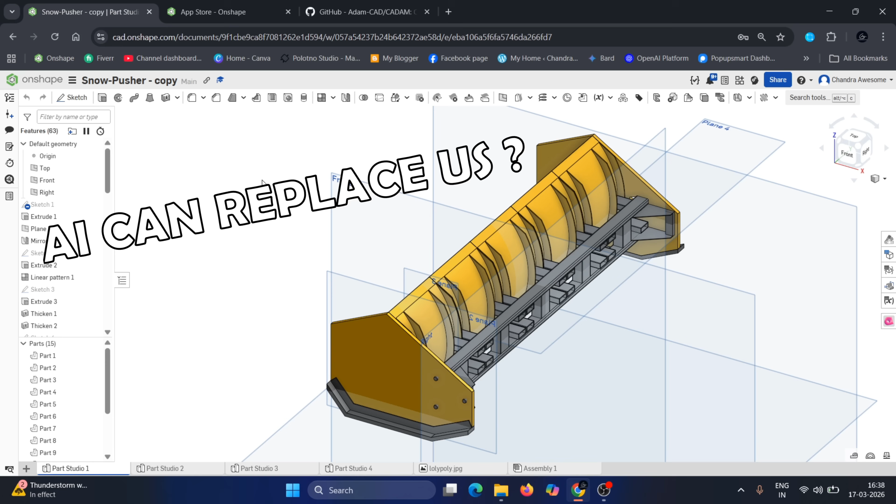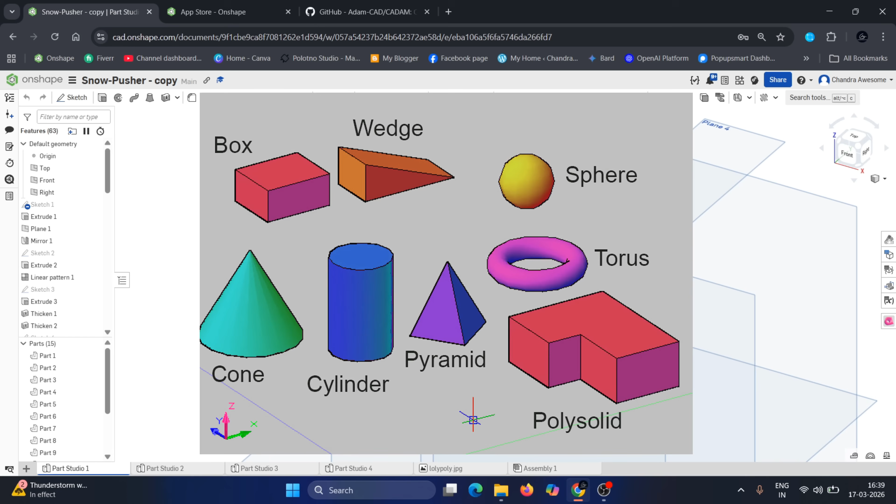So, do you think AI can replace us? Write your comment below so I can read it and reply back to you. My opinion is, yeah, AI can replace us but not completely, because it can replace 40 to 50% of CAD jobs but cannot replace 100%, because AI can only design basic shapes currently. For complex designs like the one we've designed right now, it cannot be designed by AI because it needs very precise techniques and tips we follow while designing a specific product or model in CAD software.

So I'll explain how CAD works here. Every CAD software is a piece of code in the backend. But to train an AI model to generate such a product, it needs very accurate coding. For example, if we draw a simple curve like this in the CAD space, the code for that single curve has too many lines - for example, it might take 10 lines just to draw this curve. That's why AI cannot replace us, it needs very accurate, more training for that. It's not simple text prompting, it needs a different level of precision.

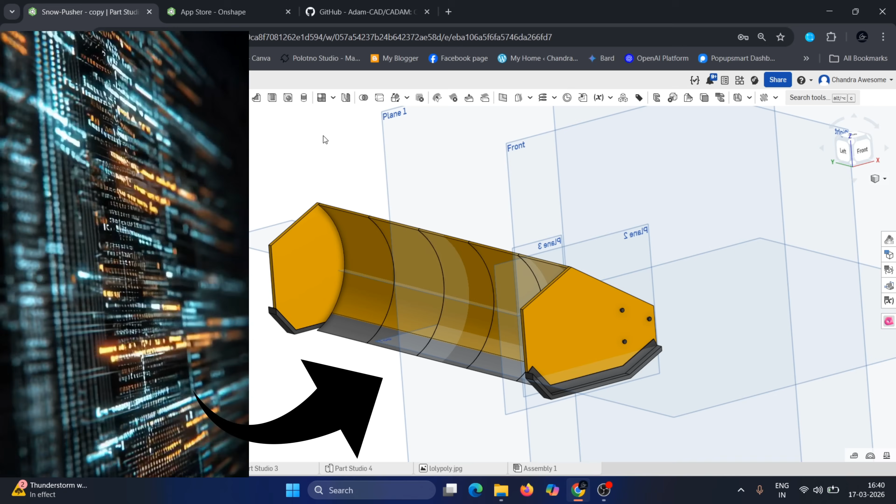Even though AI can build software, it cannot build the shapes. That's why AI tools are actually focusing on coding. By using the code, they're generating the designs instead of using the actual process or method we follow for designing a product in CAD software. So instead of competing with AI, why don't we take advantage of it? Yeah, let's take advantage of AI.

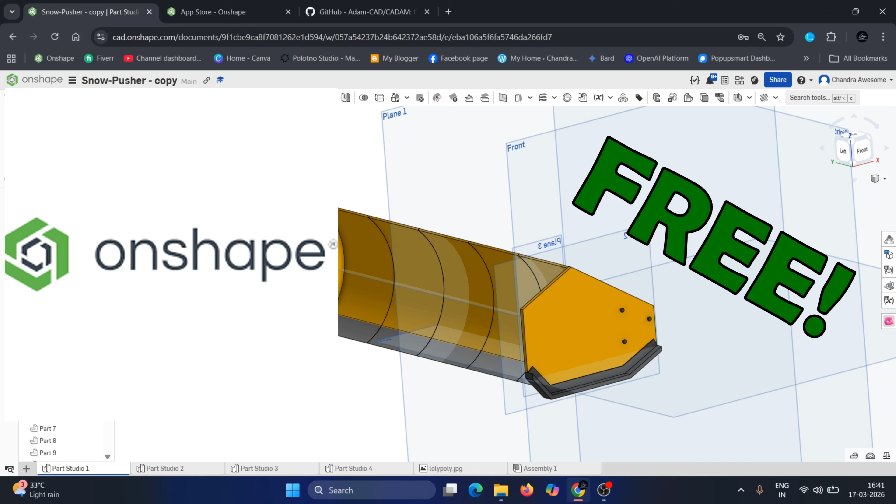After verifying many AI CAD tools, I found one that is absolutely free, but only for Onshape users, not for any other CAD software. I'm going to show you that tool, it's called AdamCAD. Just search adamcad.com on Google and you can find the page. The developer used the Onshape API along with AI tools to build a text-to-CAD tool using the Onshape interface.

Here we just need to give the prompt and it will automatically design the part which we need. This is the process - you can go to the website. How does it work? I'll explain in a simple way. We just need to give the prompt, and it will integrate with the Onshape API, write the code in the backend of the part studio, and give us the shape directly in the interface.

We have a trial version for it, if you want to use it you can. When you sign up, you'll get a one week trial. You can try how it works, and there's no free tier option, you have to pay in order to use it. But for Onshape users it is absolutely free, and I will tell you how to take advantage of this tool right now.

And we have another approach as well. This tool is developed by only one developer, and he's also made his source openly available, it is open source. You just need the instructions and code, everything is there. You just need to install it with your local server or cloud and integrate with it.

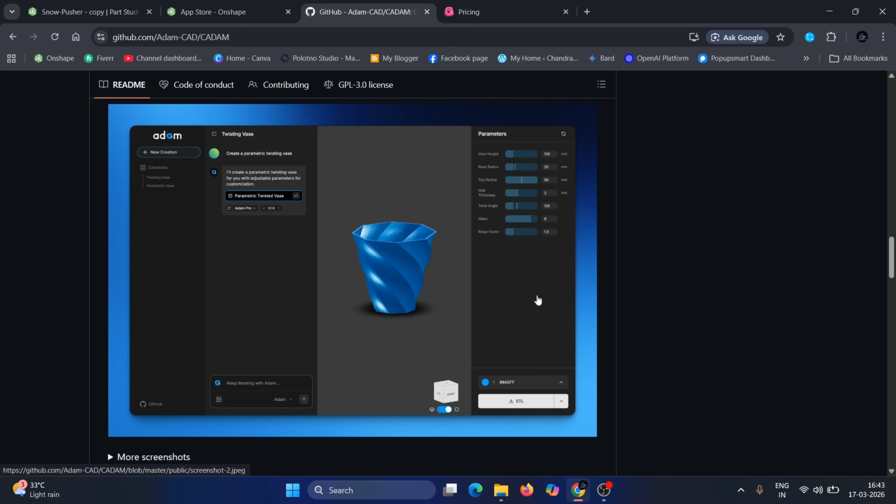But in order to use that, you need an AI CAD model API, which requires tokens to use, because the API is not free. But if you already have any API, you can integrate with it and create models like this. You can see the interface of it. How does it work? You just need to give the prompt and it will design automatically, but it only provides STL files to download. So if you are a web developer, or if you have a friend with developer skills, just go ahead and take advantage of this.

I'm going to attach this link in our description, go review it on your own. So right now let me show you how to use this in Onshape. For example, just go to the App Store - click here, go to Onshape, and you can find the App Store, right? Go to the App Store of Onshape.

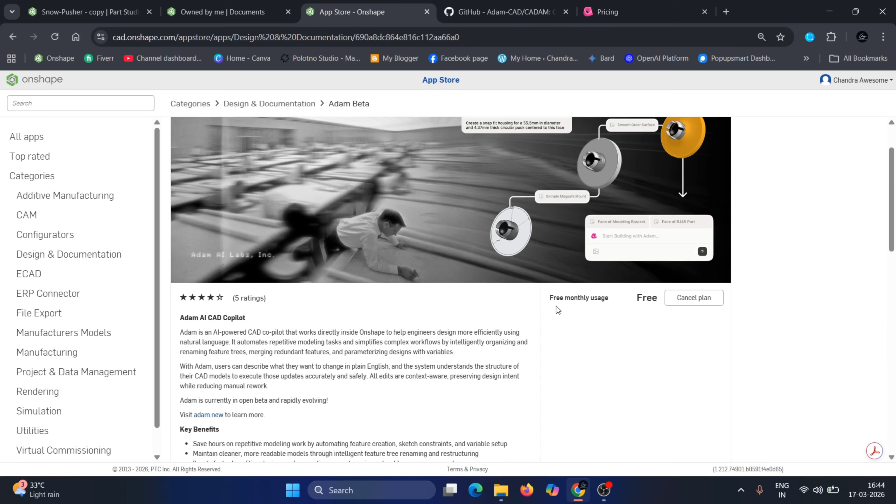Search for Adam ADAM, press enter, and you can find the tool Adam Beta. I already subscribed for it. Just click on it and click on subscribe, and you can see it is free for Onshape users.

You can take advantage of it and create the models or whatever you want. Let's take this. This is the screenshots of the interface, how it looks and works. This is the code snippet and chat box, so it can make edits or create anything you want based on what model you want.

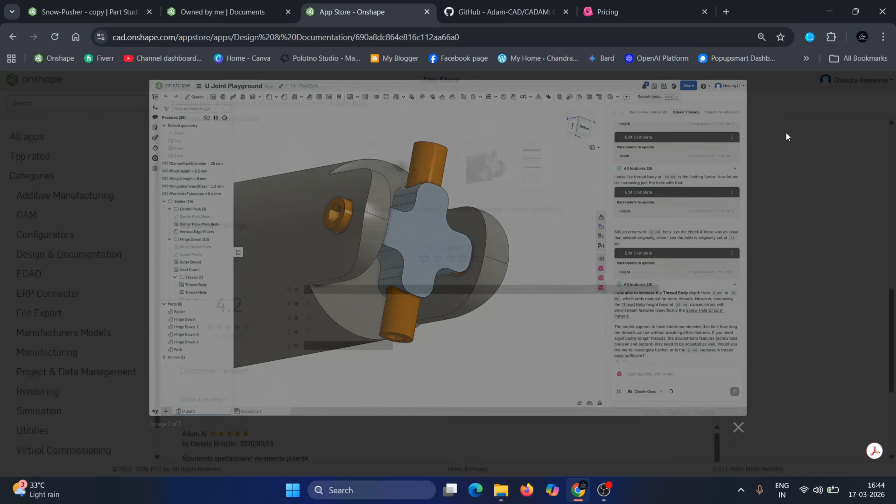So let me tell you one more thing here. This tool can be only available for student, education, enterprise and pro users only. It's not available for public users, you cannot use it. So if you have a student version, you may take a look at it and how to use it.

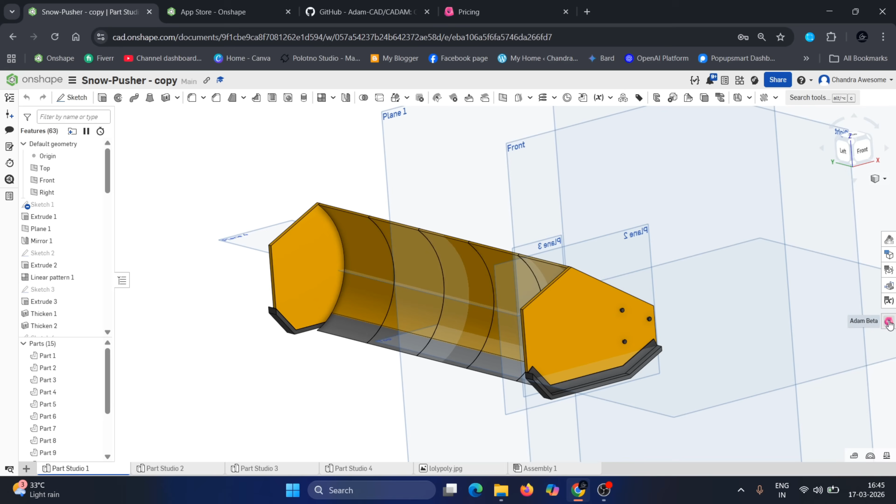Once you subscribe and go into the Onshape interface like this, you can find the tool on the right side bottom called Adam Beta. Just click on it and the interface will open. You just need to sign in, it will be asking you to sign in. Once you sign in, the chat box will open here. You just need to give the prompt, and it will try to write the code in the backend and generate the shape for you.

If you observe the tool here, we have the image option as well. If you give the image, it will scan it and try to generate the part. It cannot generate accurately, but you can get a chance of 60% accuracy. In this tool we already have different types of chat tools, ChatGPT, Claude and Gemini as well. You can take whatever you want and build with that.

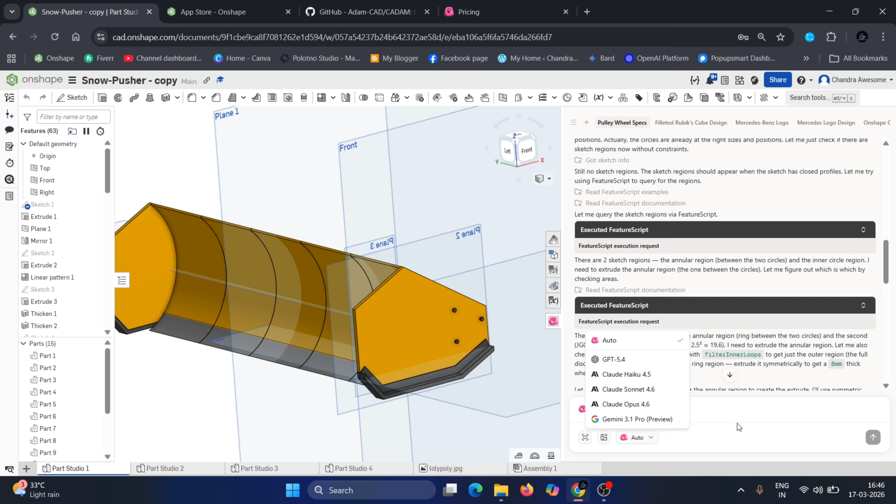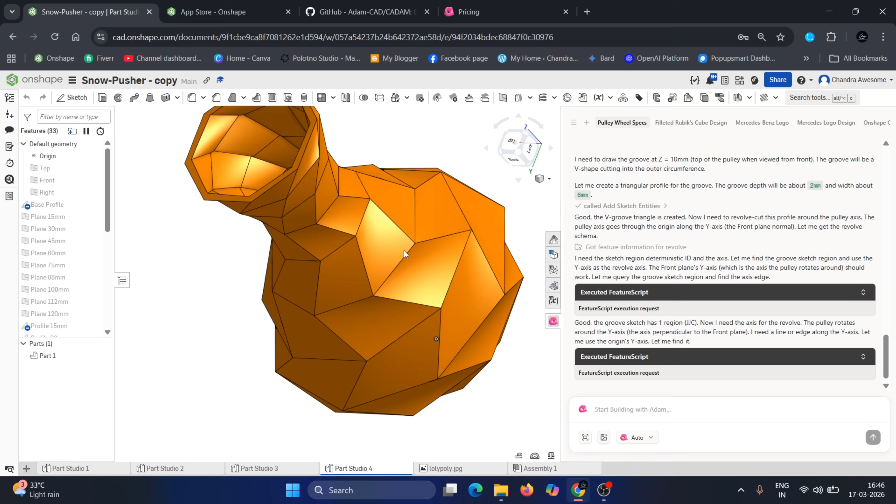So let's open a new part studio. If you see, this one is actually designed by AI. And if you see, come to this, this is also designed by AI, but after many instructions I have given on how to build this, finally it is done. So let me show you how to work with it.

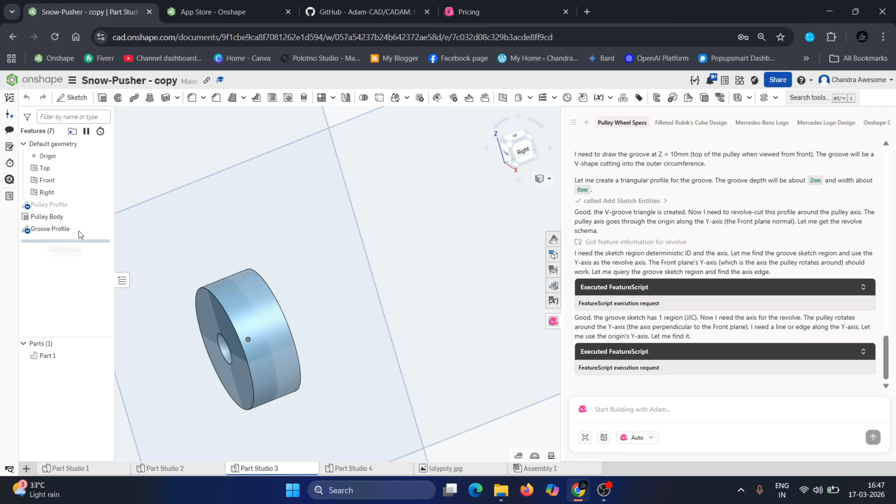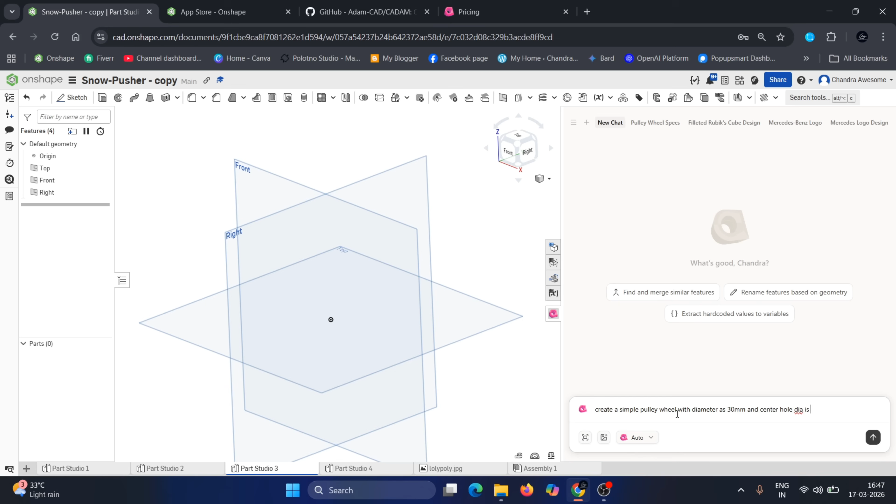So now just give the prompt. Let's create a simple pulley with instructions: create a pulley wheel with diameter as 30 mm and center hole diameter as 8 mm. Once you click enter, it will start creating.

So if you observe the interface, it is asking some questions for me. I will clarify, simplify, create a sketch, everything, draw a circle. So it's just showing how it is going to create the wheel on its own using the instructions.

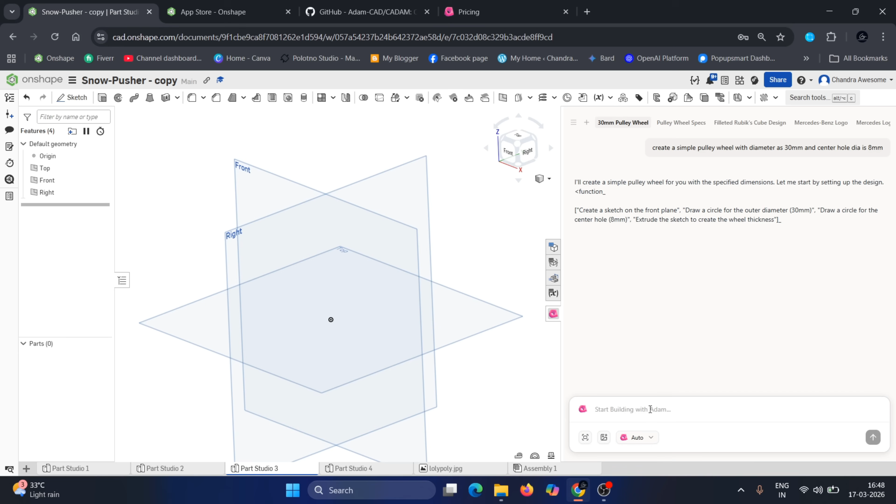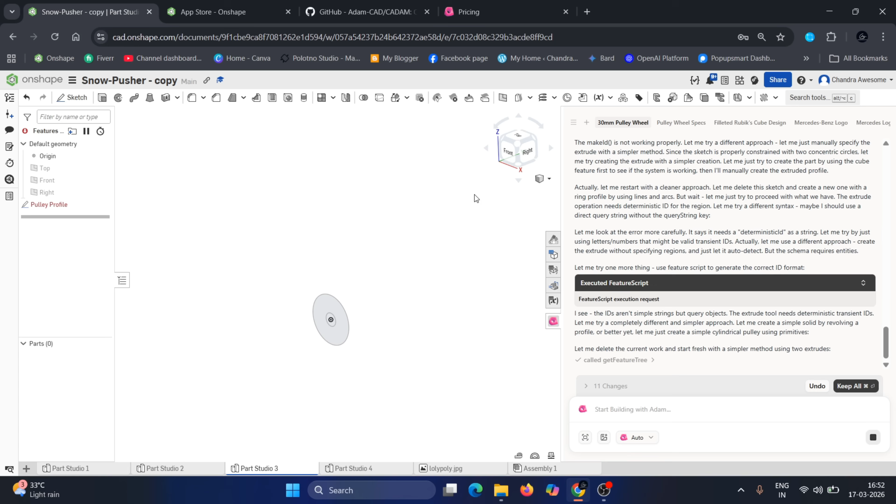It's stuck, I think. Let's give it instructions. See here, it is taking too much time just to create a simple circle sketch inside a circle. So here is where it actually lags, because we didn't provide instructions on how to design it, we just gave the prompt to design this part. This is where the AI fails. Even though it succeeds, it takes too much time, where our CAD designers complete it within a minute or less.

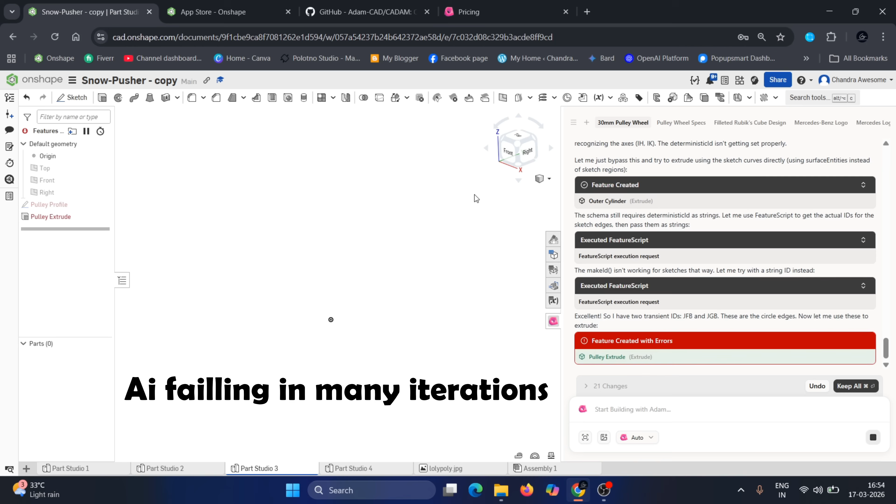I'm just forwarding the video here just to see how the output is getting done. It is taking many approaches just to create a simple cylinder here. You can expect how much time it was taking me to design just a simple vessel. I actually tried something, and it achieved something. I will show you once it's done.

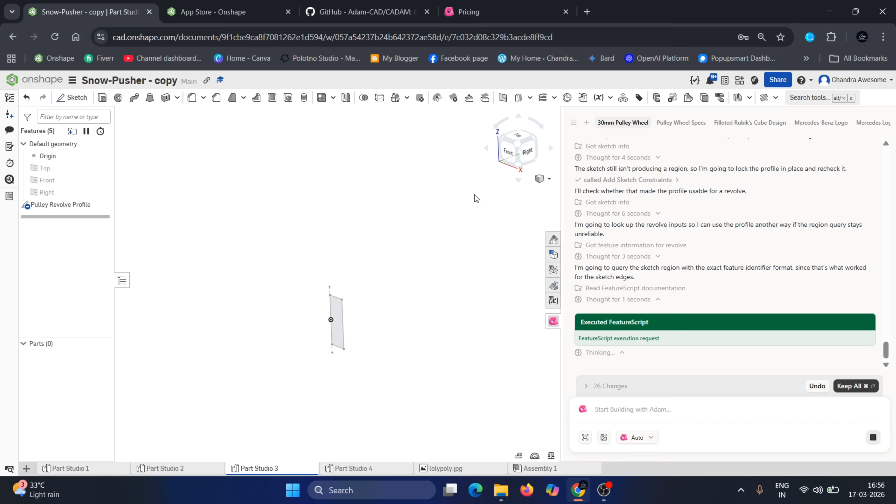Here we can see, after waiting a long period, it just created a simple cylinder and it's saying it is a complete pulley. But it doesn't add the groove in the center, so let me tell it to add the groove. But the groove is missing, can you add it with your own dimensions?

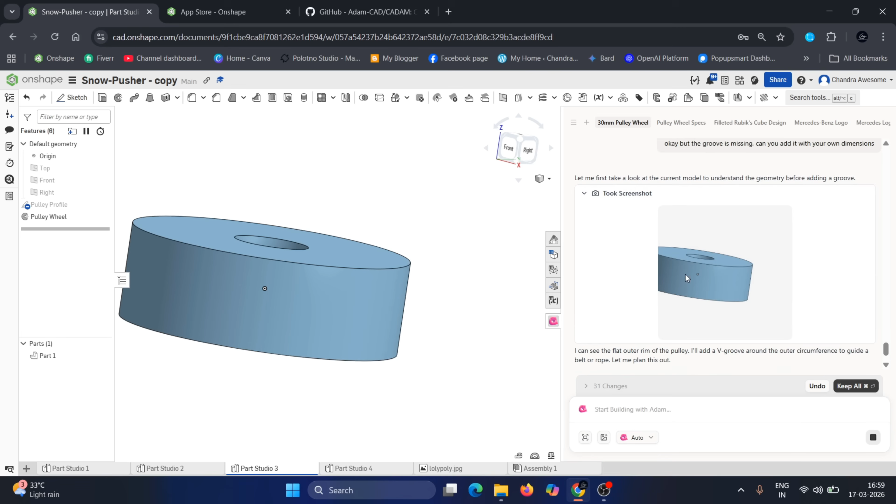So it's actually going to think. It is taking a screenshot of the page, if you click on it, it will take how the part is actually showing. So it is going to create a groove, let's see. So it is taking a V groove, triangle vertex. It's already taken dimensions. It seems like it has already drawn the sketch.

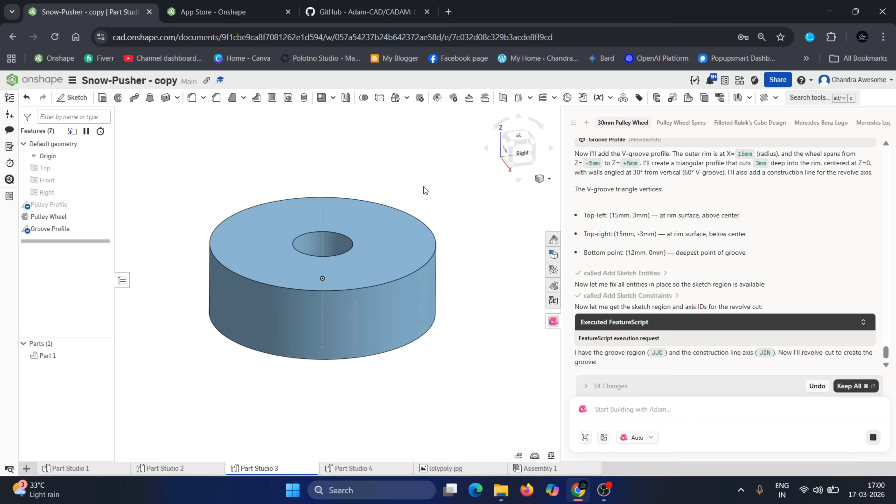And there you go. We got the pulley. As we instructed, create a groove for this, and it created, and we got the pulley wheel exactly for us.

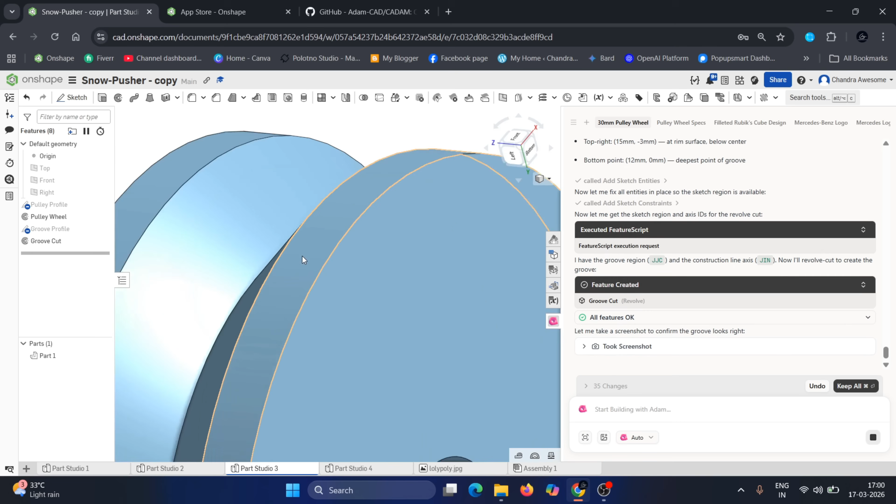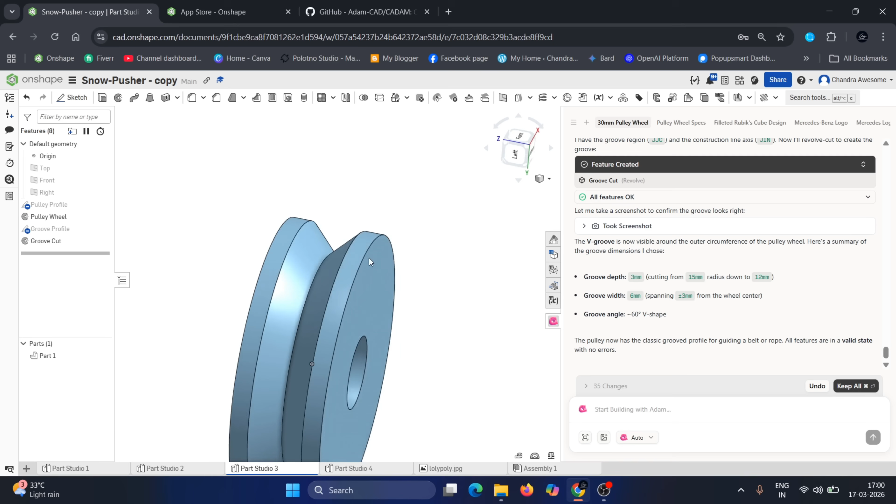It's taking the screenshot just for confirmation whether the lesson is okay or not. So we just instructing and providing summary. The pulley wheel is completely created. Yes, it is created, but it almost takes so much time for just generating this body part.

And the advantage of this is we can export this part as whatever we want, like previously we can export like STL or several other output and export formats we want. That is the advantage of it. If you want, or else you can even edit the feature as well on your own.

Actually, instead of using the dimensions, it is drawing one thing and using the fix feature, so it cannot over constrain and move anywhere. So this is the actual approach it is using.

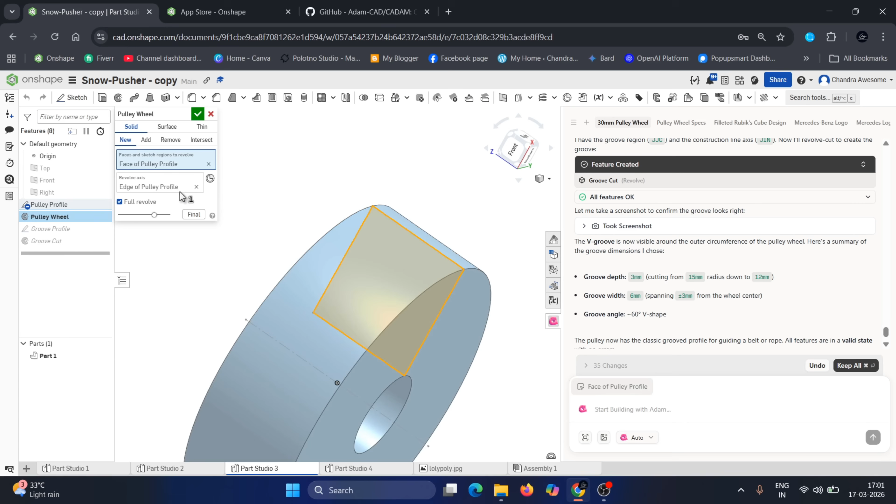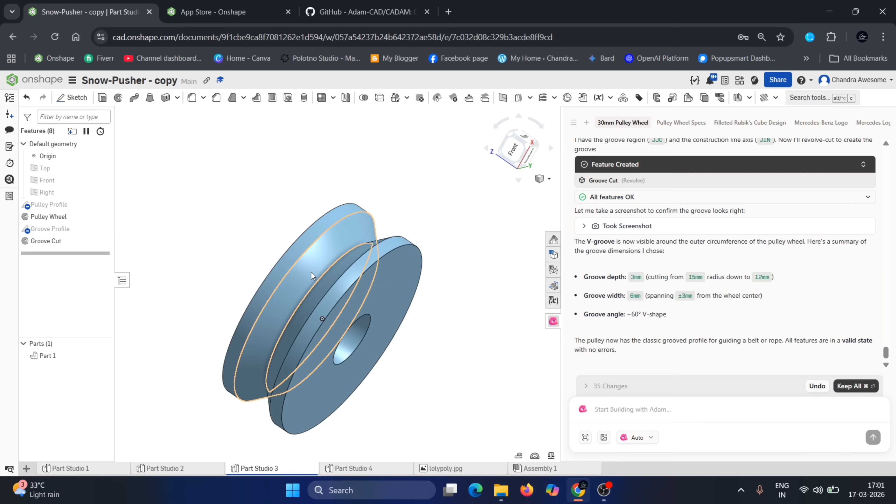In the features as well, every sketch will be same like this. It is going to use the fix tool instead of dimensions, but the dimensions will be equal once we search here. And based on the feature we can also tell it to edit. So this is the groove how it actually developed.

Let's go to the image. So it is thinking it is simple. Okay, so let's use this image. It's a snap ring actually.

So I'm going to tell it to create using the image I'm going to show here. Or else you need to save the image here. I'm saving the image in the downloads folder, snap ring, save it. Now I'm going back to the same Onshape and click on the image function here, so it will ask you to upload.

Just go to the search for snap ring and open, so the image will be shown like this. So let's tell this Adam tool to design the snap ring as shown in the image.

I'm not going to give the name, so it observes the image clearly. Design the ring exactly as showing in the image. You can take your dimensions. I'm going to click on enter.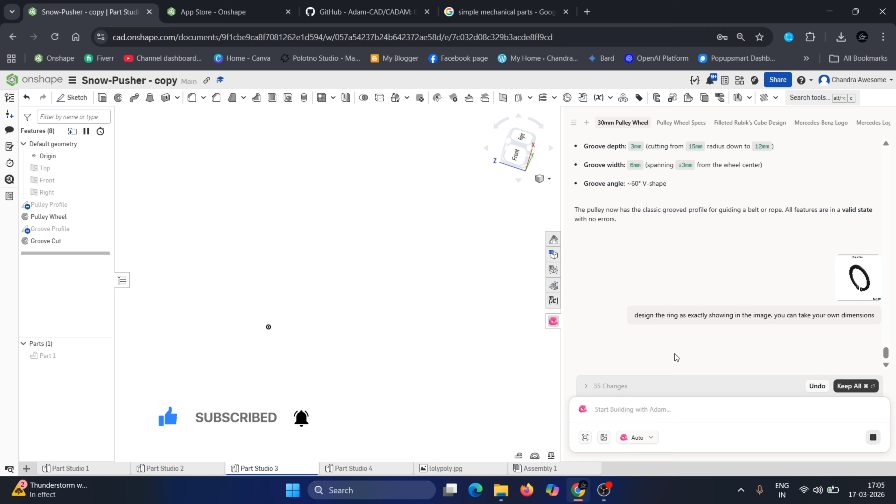Now it is going to read the image and design the part we want here. I don't know how much time it takes here. It clearly understands the image is the external snap ring, so it is going to create it on its own. It's taking the dimensions like it's shown on its own, we can also see that. Let's see how much time it takes and design it here.

It has created a ring and created the shapes, but it is not accurate. It is saying the checks have failed, and it is trying to figure out. If we observe, it is saying that everything is good.

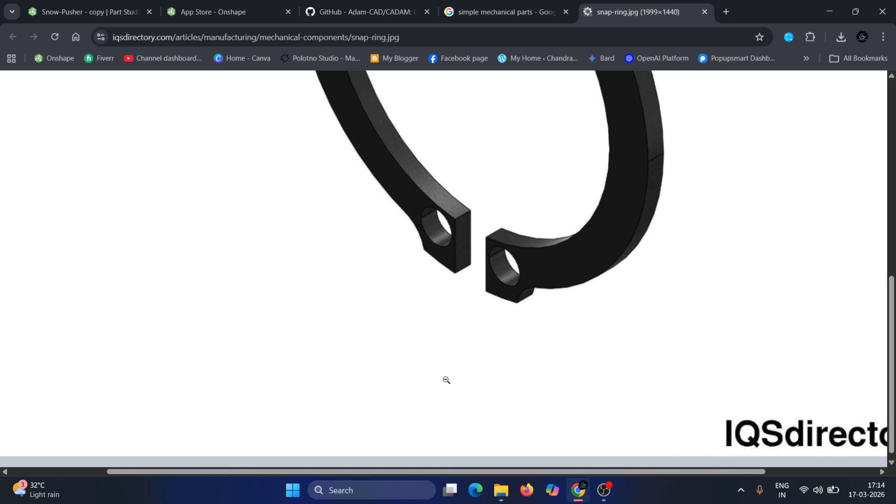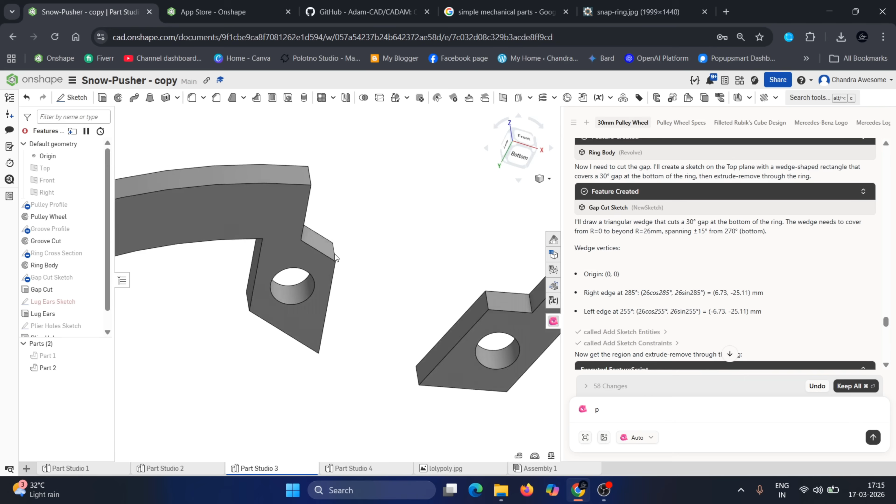So it's actually watching it in this way instead of the front view. It is actually in third angle projection something. This is why it thought this is the actual shape that needs to be drawn, but it is different, right? But yeah, it is trying on its side. It's actually able to generate the parts we want based on simple images.

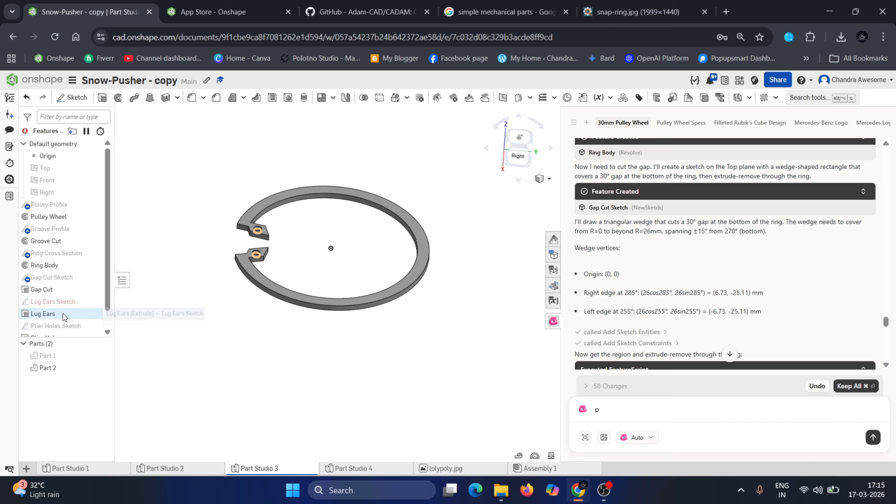Hope the information is useful for you, and you can take advantage of this tool to make your work simpler and save your time. It will also be helpful to teach you how to design something, and we already have the features, so if you want, you can also make edits to it. I think that's all for the video.

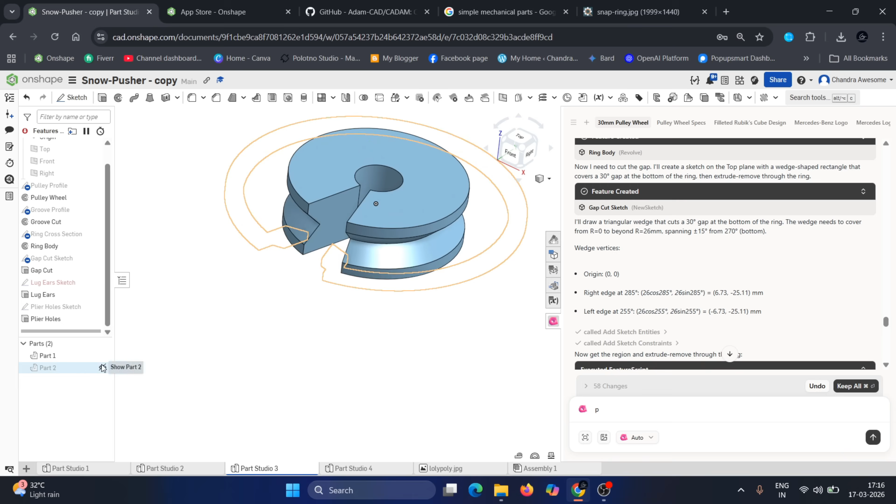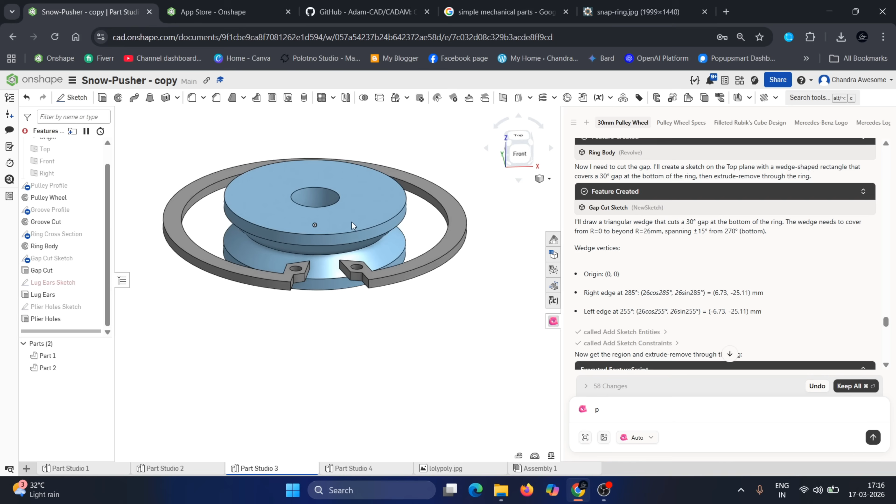I hope the information is useful for you. Once again, you can take advantage of the chat, and sometimes you will get a message saying tokens are over. But just wait for 12 or 24 hours or 1 day, so the tokens will be renewed and you can use the tool as usual.